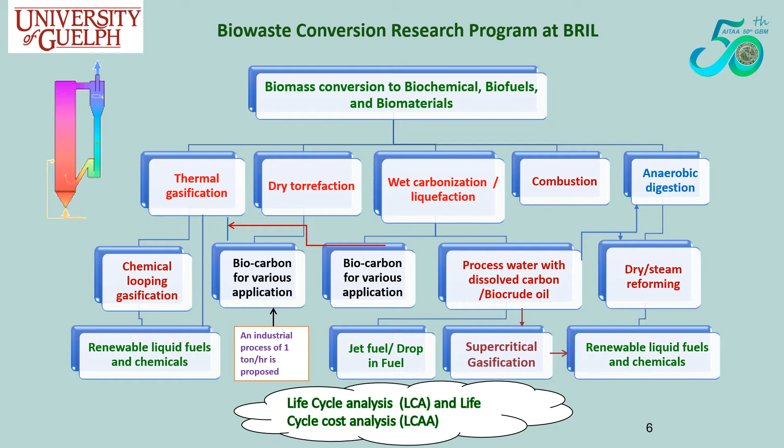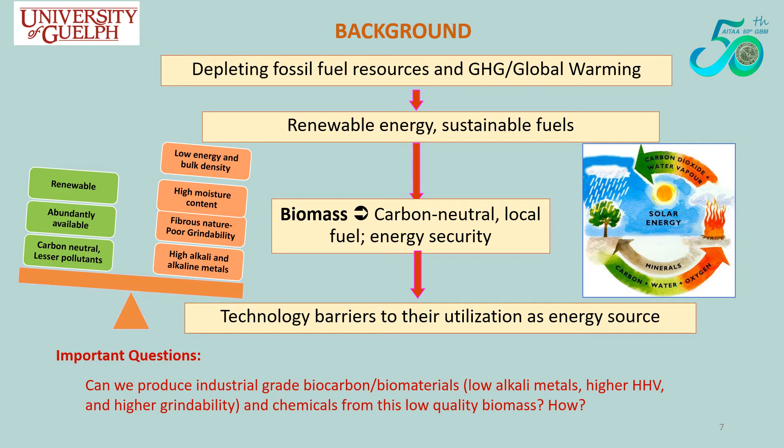So when we talk about waste and biomass, we realize it is carbon neutral, especially waste, and it creates energy security. But the main technical barriers are low energy and low bulk density, high moisture content, fiber that is difficult to grind, and high alkali metals. So the research question is: how can we produce an industrial grade biocarbon or biomaterials with very low alkali metal, higher heating value, and high grindability from these low quality bio-waste resources?

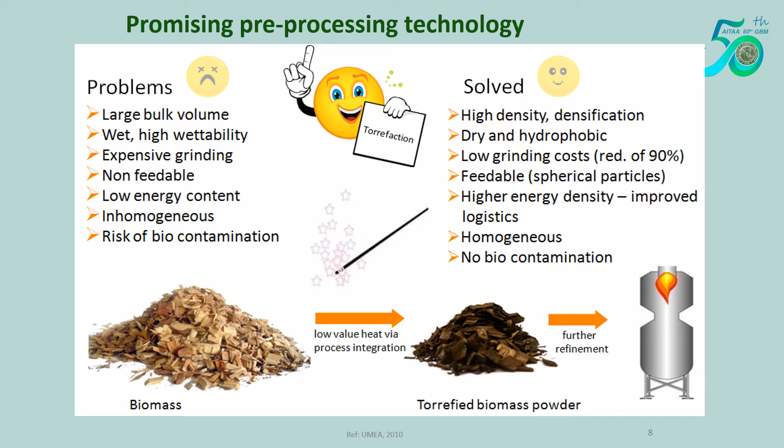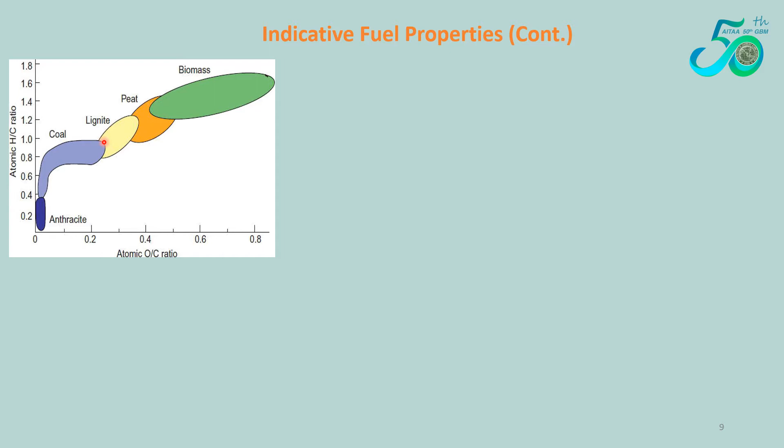The typical solution people currently use is torrefaction, which is just simple heating at low temperature, mild pyrolysis, and it is able to address some of those challenges. For example, it can produce high density fuel, no biocontamination, and hydrophobic materials at the end. What it does is bring biomass back, especially to the lignite stage. As can be seen here, by removing the oxygen content from the biomass, one can bring it back to the peat or lignite stage.

The problem still is the higher energy demand for wet biomass, especially if it has a lot of moisture, because one needs to remove all that moisture from the biomass or waste, and that needs a lot of latent heat energy. Also, lots of biomass comes with high ash content that has high potassium, sodium, and alkali metals that contribute to agglomeration, and torrefaction cannot remove it.

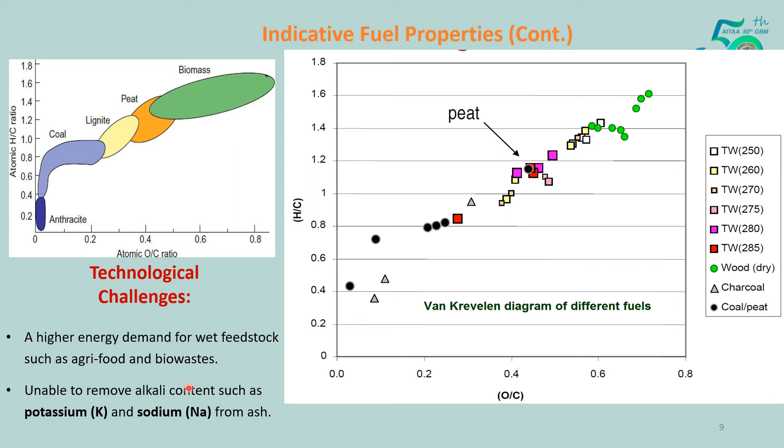In that context, hydrothermal carbonization, a technique where biomass is treated in hot compressed water instead of drying, can make a big impact. Instead of heating it and removing moisture, it cooks underwater like a pressure cooker, separating the solid material from the other part and depositing it as a hydrochar.

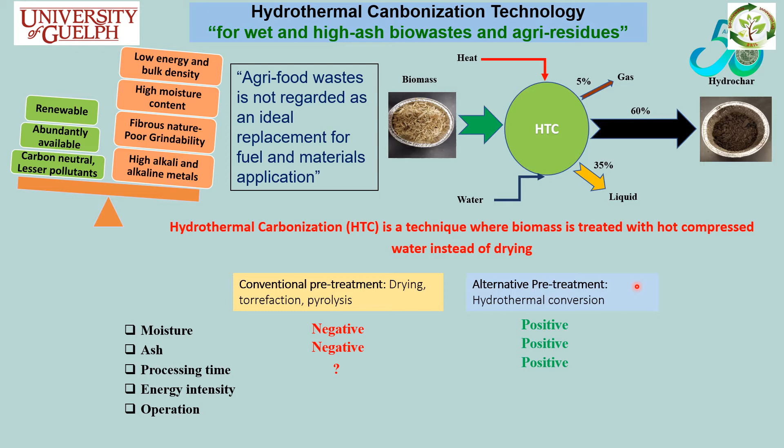So if we want to differentiate current conversion technology and hydrothermal conversion technology: in terms of moisture content, hydrothermal has a positive response because it cooks underwater, and it is also able to remove alkali metals by leaching the ash content and alkali. Also, because the heat transfer coefficient in water is very high, cooking takes much faster. And energy intensity is one of the things that needs to be investigated.

But in terms of operation, the conventional system has been operating over the years, so it's pretty easy to use it. However, in hydrothermal conversion, where feeding of biomass is against pressure, it could be a challenge and needs to be investigated.

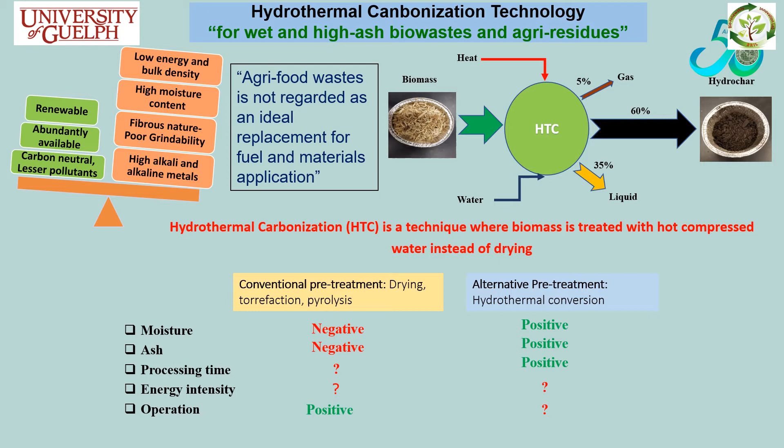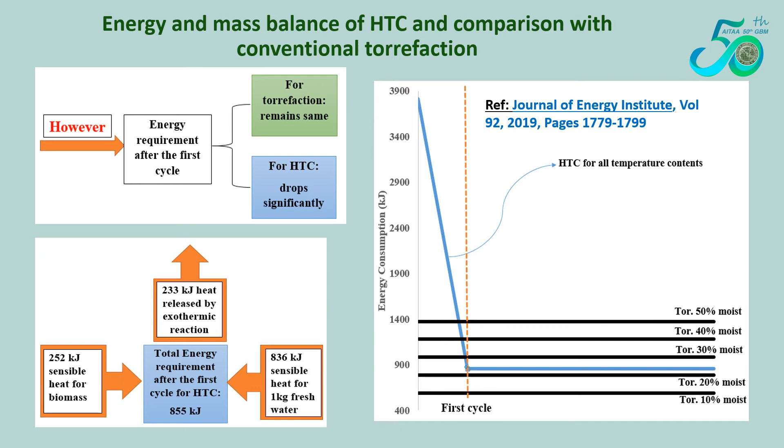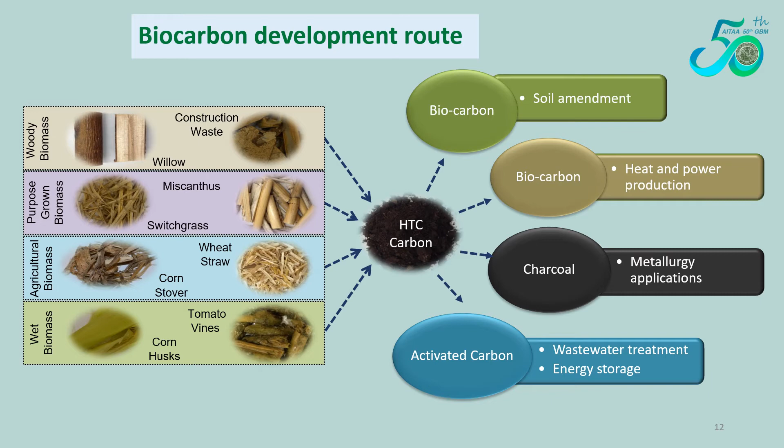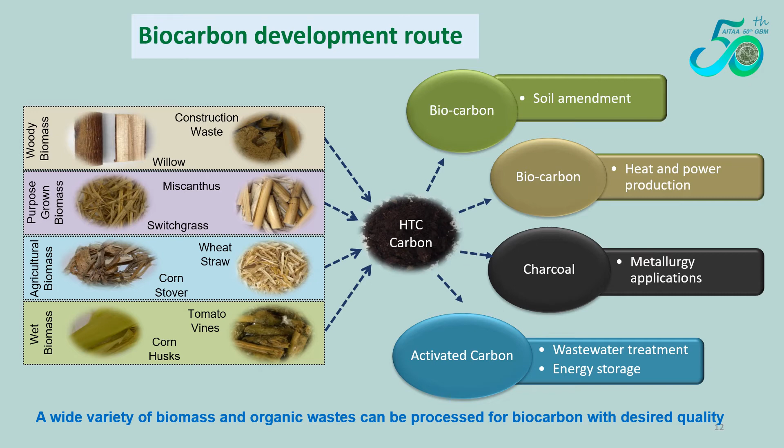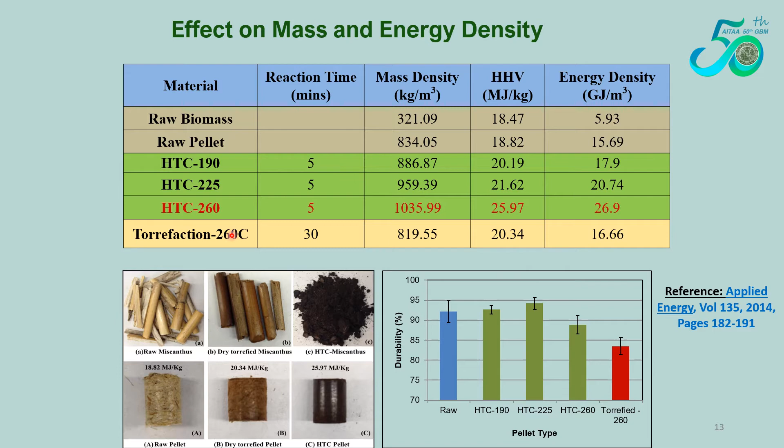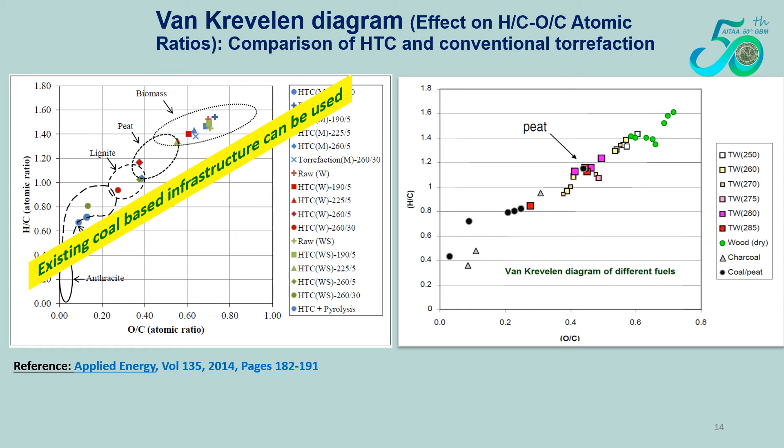So that shows that this carbon has a pretty high potential over torrefaction, which has a much lower heating value and lower energy density, comparable to the chart. Hydrothermal carbonization at about 260 degrees is able to bring it near bituminous coal, as can be seen from this van Krevelen diagram, whereas torrefaction products are still in the peat or lignite stage. So we can conclude that existing coal-based infrastructure can be used for this kind of biomass conversion process.

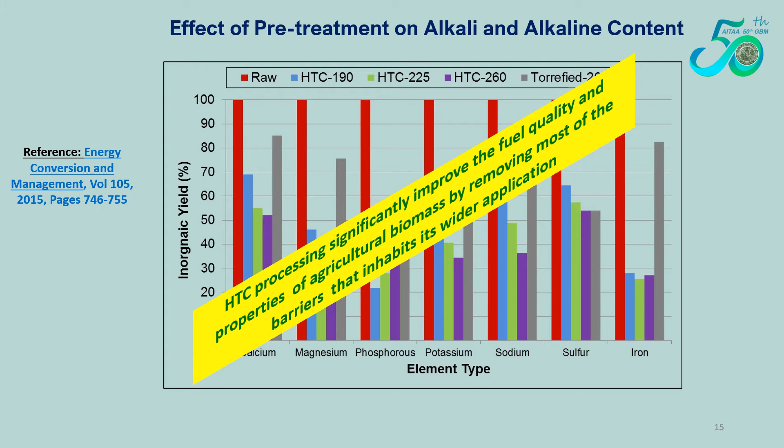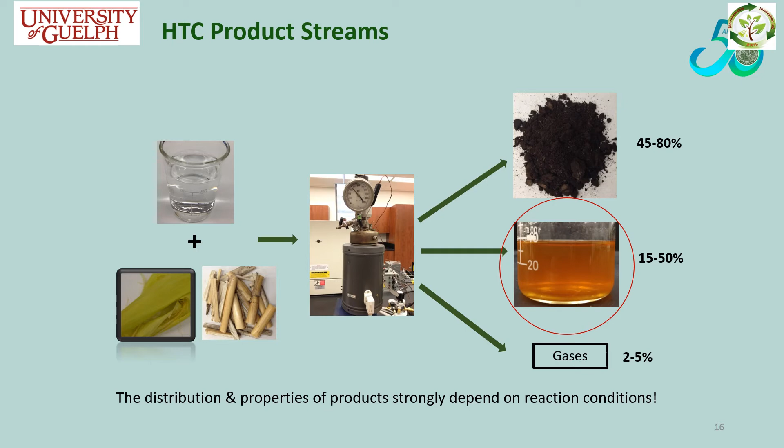When we produce this hydrothermal carbonization, it also produces this liquid or process water. Now, what can we do with this process water? We characterized it and found that it contains a lot of acetic acid, levulinic acid, and also organic carbon. And as we know, this kind of wastewater can be processed with anaerobic digestion, wherein hydrolysis is one of the main rate-limiting steps. So if we are able to integrate hydrothermal carbonization process water with anaerobic digestion, hydrolysis will be enhanced, and one can expect more gas yield.

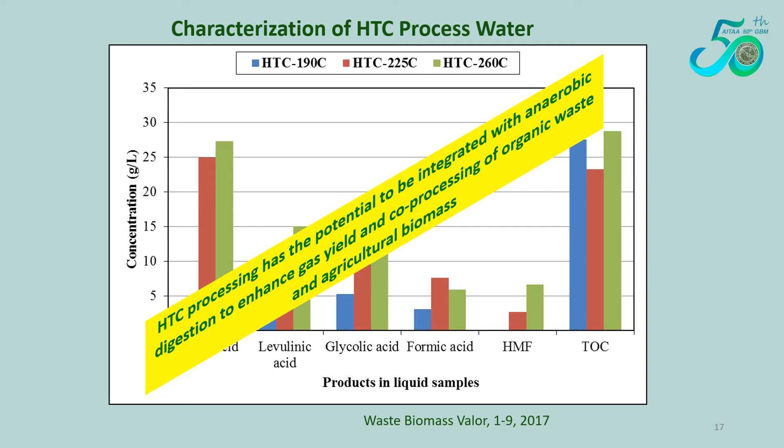So hydrothermal processing has the potential to be integrated with anaerobic digestion to enhance gas yield and co-processing of organic waste. These all lead to development of a complete circular economy approach for a farm. This slide will talk about an example for a farm based on corn residue, and what one can do looking into the circular economy approach.

So here, the corn residue is first hydrothermally converted, and the biocarbon has potential for various applications, for example combined heat and power or heating. The liquid process water can go to anaerobic digestion to produce biogas, and the leachate has a nutrient recovery of nitrogen, phosphorus, potassium, and sulfur at the percentages shown. This paper has been published in Energy Journal, and it shows an overall energy recovery of 79%.

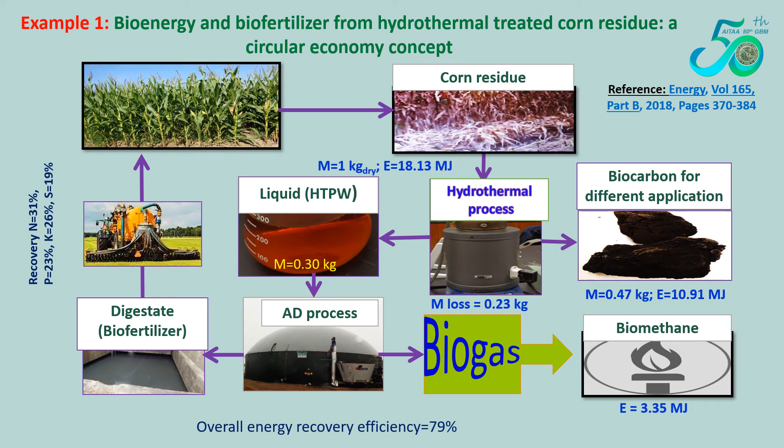So based on this approach, an approach is proposed for a community here in Canada, where lignocellulosic biomass can be used in the hydrothermal reactor to produce hydrochar. That hydrochar can be used for combined heat and power, for a remote community or greenhouse application.

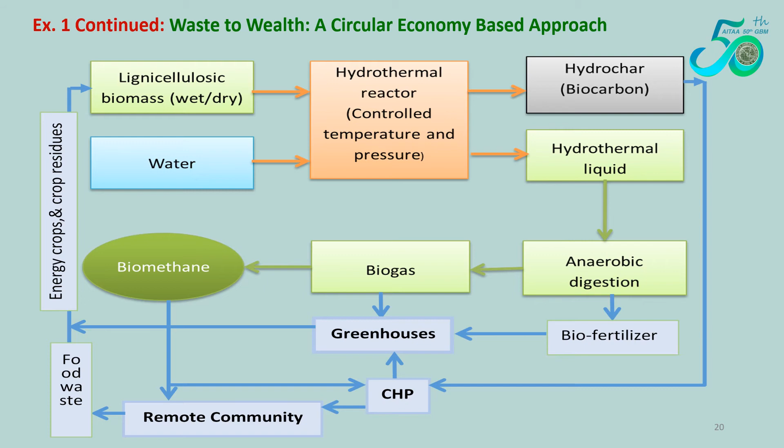On the other hand, the liquid water can be used for anaerobic digestion to further produce biogas for greenhouse heating or the community, and the community will generate food waste and energy crops that can further be processed in the hydrothermal reactor. So in a way, it is able to circulate the whole resources, especially for a rural or remote community.

Further, we wanted to develop value from this hydrochar. So the example will show how we can make high value activated carbon. What we do here, we again use corn grains that produce the corn wet distillers' fiber, especially in Ontario. Ethanol is a big industry and they produce a lot of corn fiber, currently used for animal feeding or just waste.

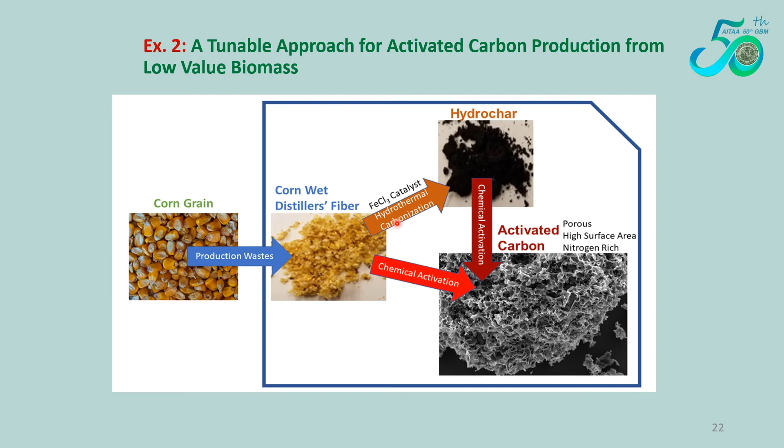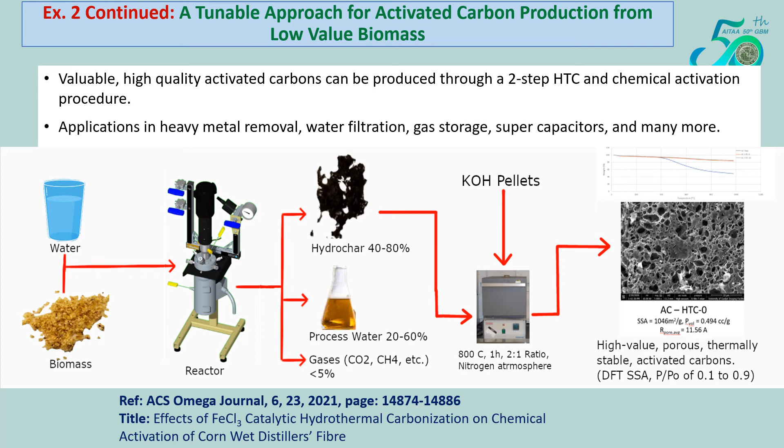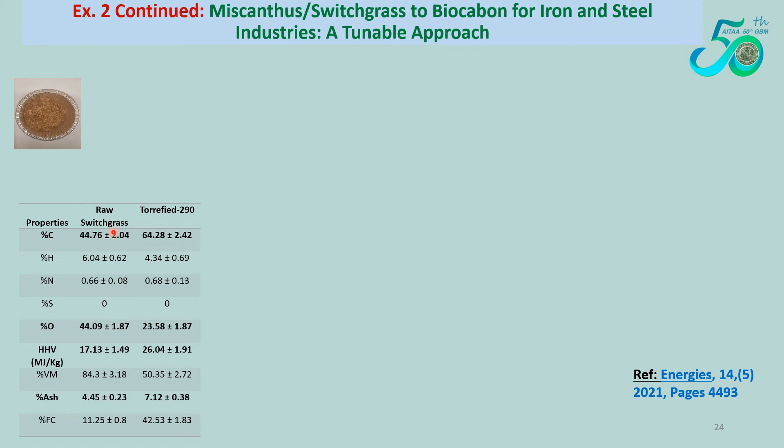We also looked into another area, the iron and steel industry, because the iron and steel industry uses a lot of coal and its CO2 emission is one of the highest per unit production. So we try to reduce this. This work has been with ArcelorMittal Group of Canada. We looked into agricultural biomass, something like raw switchgrass, that has a very high ash content. We first tried to torrefy it, but we found that the ash content actually increased through the torrefaction process, from 4.45 to 7.12.

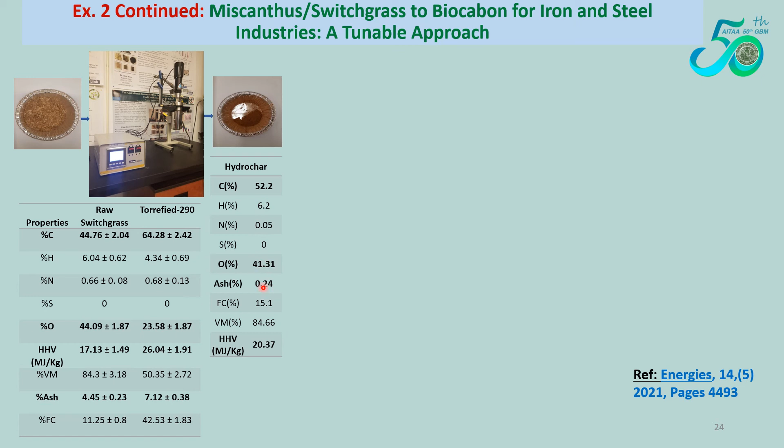Then we first introduced the hydrothermal conversion process, which reduces the ash content, and the product is further converted to active biocarbon through a slow pyrolysis process at a higher temperature. That is able to produce a biocarbon similar to PCI coal in terms of carbon and heating value, and ash is further reduced fairly heavily, because one of the problems with PCI coal is that it cannot tolerate alkali metals in the coal.

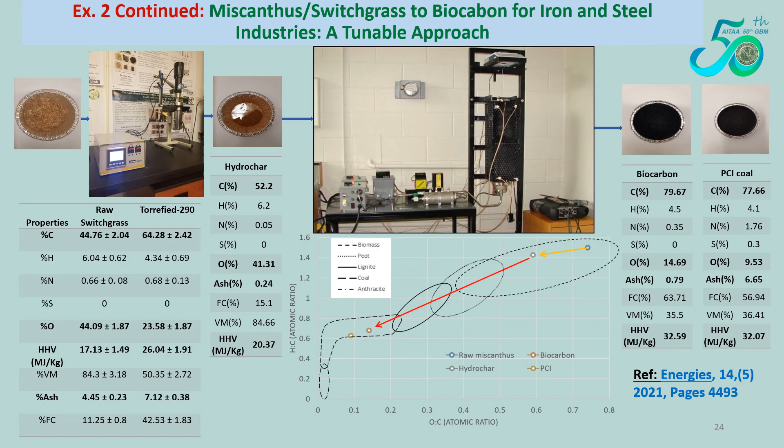So we are able to remove that, and the process shows that initially it's mostly a leaching process, the hydrothermal carbonization processing, able to reduce lots of the alkali, and then with slow pyrolysis we are able to produce a desired quality of biocarbon. Based on that, we propose this overall closed loop scenario that is able to produce PCI coal type quality carbon from agricultural biomass or any kind of waste biomass with high ash content, removing all the barriers, integrating the HTC process with slow pyrolysis, able to replace fossil carbon in the blast furnace as well as reduce greenhouse emissions.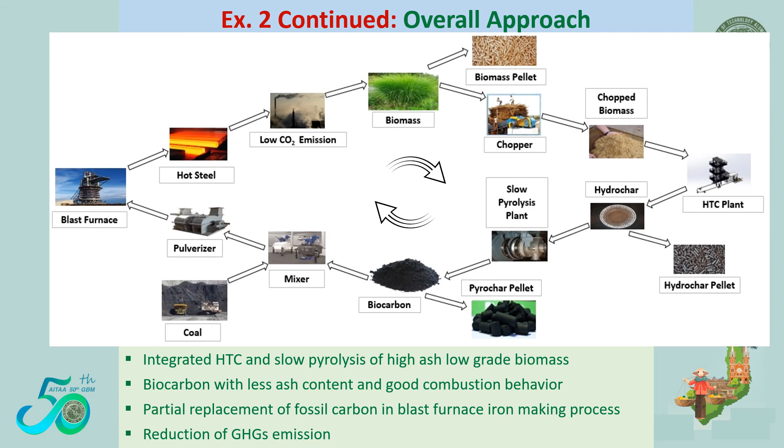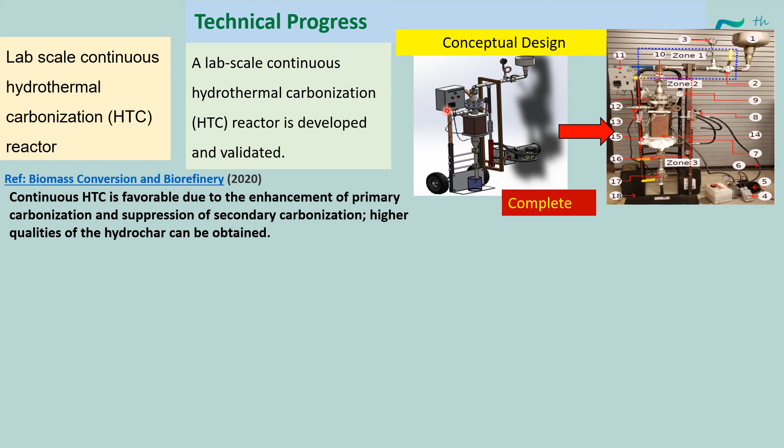That leads to the technical progression, because hydrothermal carbonization is a challenging one, since feeding biomass against pressure is a challenge. So we developed a bench scale, a pilot scale continuous process, and studied the quality of carbon, and we found that even with the continuous approach, the carbon quality is better than the batch quality carbon. Based on this concept, we developed an innovative conceptual design, which is under commissioning. It is a 50 kg per hour hydrothermal carbonization reactor.

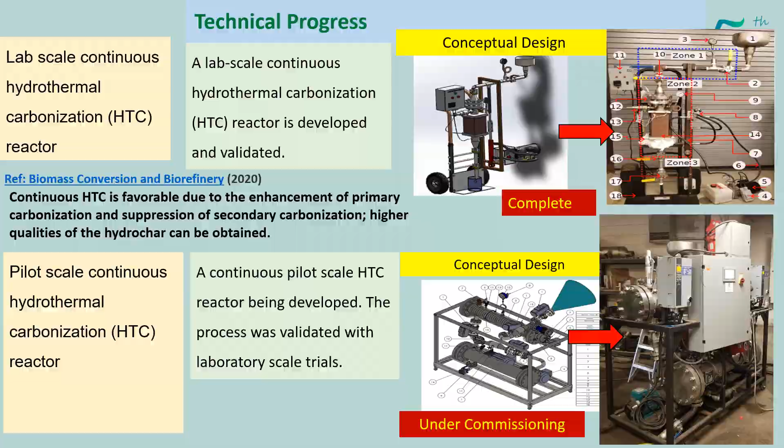So in conclusion, we are able to pre-process greenhouse residues, energy crop residue, municipal green bin and processing waste through hydrothermal processing. The key is hydrothermal carbonization, able to produce a hydrochar that can be further converted into biocoke, activated carbon for water treatment, coal for CHP power, electrodes for batteries as energy storage, or used as a catalyst for catalytic activity.

The liquid can again be converted through anaerobic digestion to produce biogas, which by cleaning can be used as biomethane, and the digestate can be used as biofertilizer. So that leads to a zero waste solution. We can say that hydrothermal carbonization products from low quality agri-food residue can be a potential new value chain.